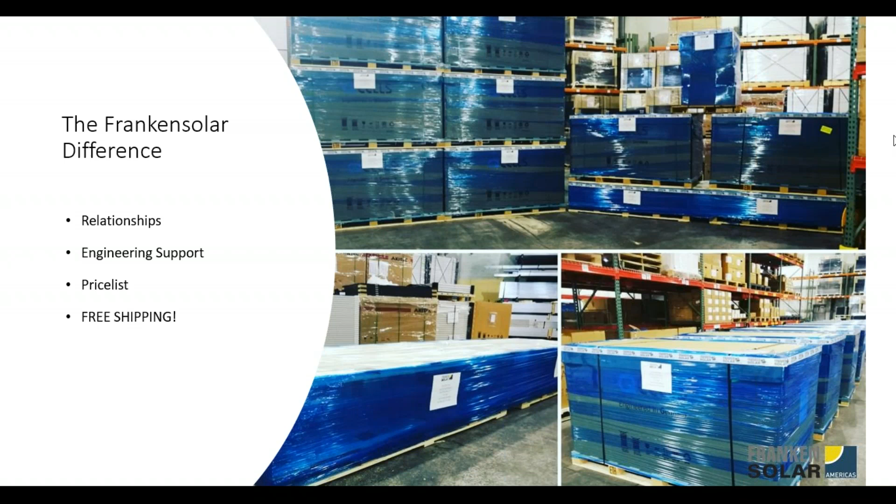So RoofTech, for those that were here early, Joe and I were talking about meeting up in Nova Scotia back in 2018 for the first time. That's the first time I really learned about the product. Basically what sold myself and the rest of the Frankensolar team that this is a really good product is, first of all, they've been around for a very long time and they've been very successful in the Japanese market. I'm sure Joe will talk about it later.

Also the fact that you can connect into the decking of the roof really gives us a lot of flexibility when we're installing on site, as opposed to having trusses and missing trusses and things like that, and having to pre-drill, etc. The RoofTech has been a great product, and pretty much from the beginning we just tried it out on a few sites with customers, and the feedback was really positive. So at that point we decided to stock more and more, and they basically just fly off the shelf. That's why we feel very strong about it.

And the RTMini, which is where we're at now with this slide, it really works in high snow and wind loads. It's super flexible because you're getting into the decking as opposed to the substructure, and it still allows for a rail-based system, which is nice.

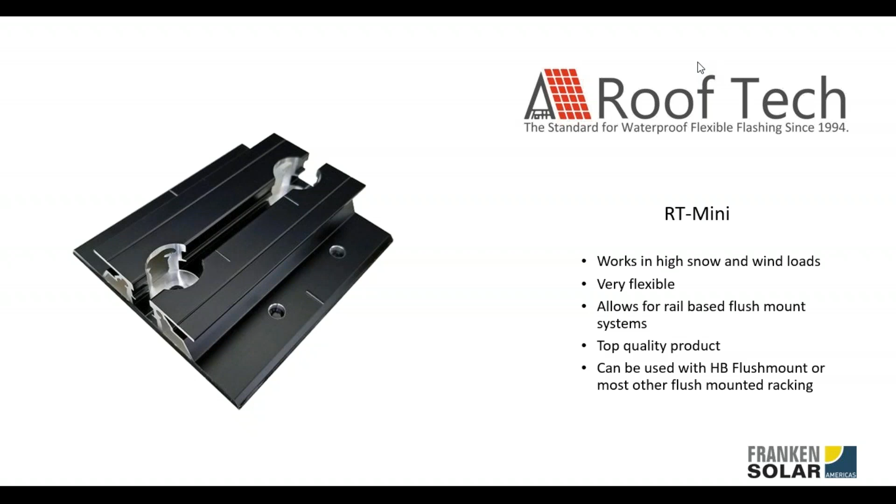So I'm going to start today off by giving a little background on RoofTech. Some of you may have already been made familiar with our beginnings and where we've been, our engineering and testing, our product line, and then we're going to get into some best practices and frequently asked questions.

And then we'll open the floor back up in case you guys have any questions about application or engineering or anything like that. So we are, as Danny said, one of the old school solar companies.

We started in '94 when the Japanese solar industry approached us, Yanegiken, to develop a way to attach solar PV modules

in a retrofit onto rooftops, which was a new idea. So Yanegiken is a 55-year-old manufacturer of roofing technologies, everything from fasteners to underlayment to tile to shingle.

So there was a natural relationship right away. If you're going to do rooftop solar, let's get the roofing industry involved.

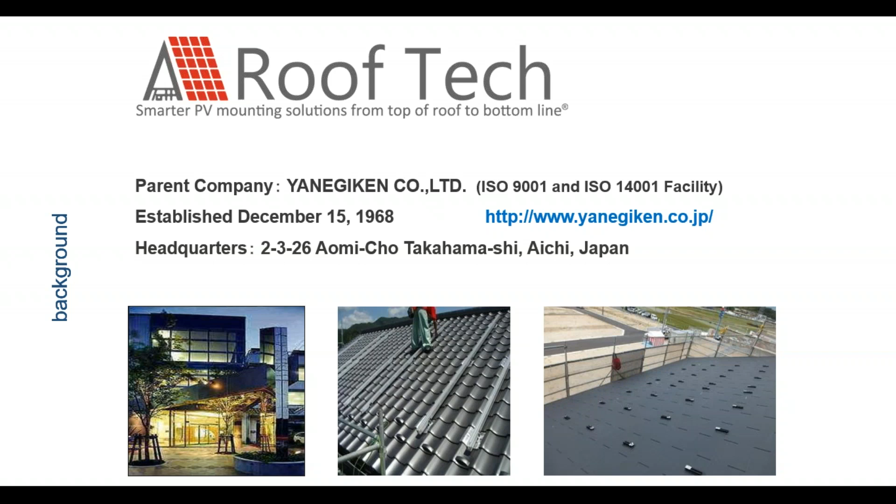So in the coming years, you're going to see more innovations quicker because we just have more bodies and minds developing solutions for our market. So we're really excited about that.

Like I said, in Aichi, Japan, our headquarters, Yanegiken has a facility where we do all of our testing and engineering. It is a robust testing facility with mechanical load testing,

carbon arc to simulate the aging process, high intensity blowers, and salt spray.

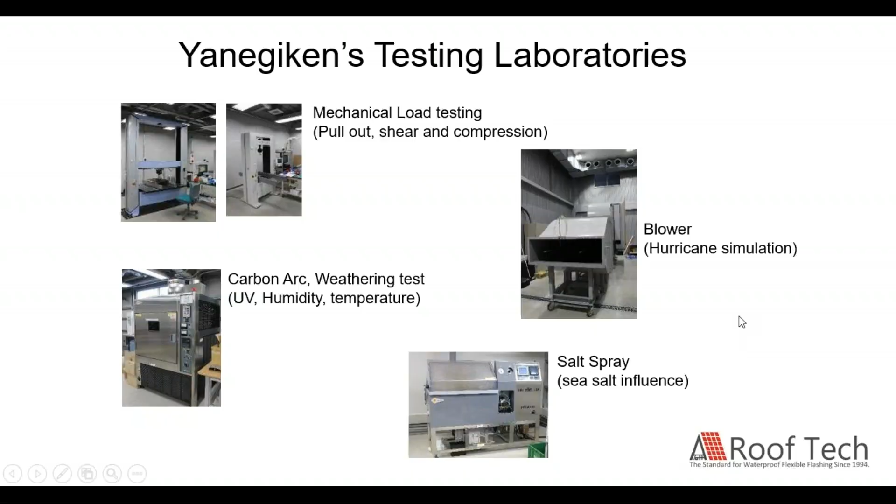We also have outdoor facilities. So we have sections of land by the sea, in the mountains, and in urban settings where we mount our products and wait.

When I say wait, I mean wait like 30 years. Our technologies have not changed since their first iteration.

The RT Butyl and the aluminum base have remained unchanged, as well as the double helix fasteners that we use in our products, unchanged since 1994.

And those were all materials that we had borrowed from our roofing

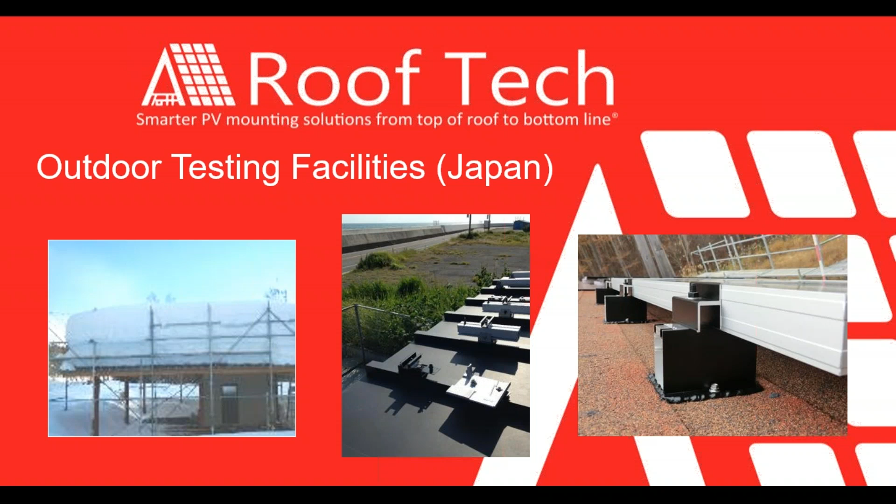industry and brought right into solar. So it makes it strong, it makes it robust, and it makes it something that stands the test of time.

As I mentioned, either you know RoofTech or you don't, we do things a little bit different. Rather than using an 8mm or 5/16 lag going into the rafter,

we utilize a 3/16 or 5mm wood screw. That provides you with a much better opportunity, a much higher percentage of placing that fastener onto a structural member in the sweet spot, that center 61%.

Because anything outside of that center 61% would not necessarily provide you with a sound structural value, right?

And that is a much smaller margin when you're looking at that 5/16 lag. You've got 37% of that rafter to hit compared to 61%.

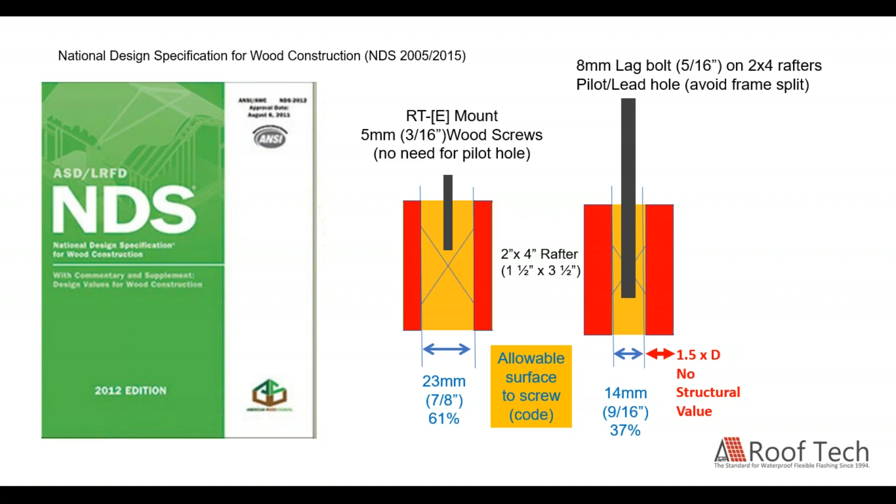Substantial difference. Like I said, with our butyl, that butyl gets driven through, whether you're going into the rafter or you're attaching to the decking. Our RT Butyl has been around since the beginning of our roofing business. Butyl was a common material to use for roofing. It's hydrophobic, it's malleable, and it lasts a long time. The RT Butyl is proprietarily our own. This is not the same butyl or mastic or anything that you could buy at a home improvement store. This is developed by us and produced by us, and that difference is, I'll leave it to the tale of the tape.

We have a 25-year plus service life. Some of our first systems from '94 are still in service. So we've got 26 years of leak-free performance with over 100 million roof penetrations worldwide, with about 20 million of those being in the United States alone. We've had maybe 5 calls for leaks out of those 100 million roof penetrations.

Have been with people that were fairly careless. The one we've had in North America, the installer self-admittedly installed our bases on top of ice. So it was destined to fail. But with that said, we went out, we evaluated the site, we had a candid conversation with the installer, and we spent a couple days making sure that the entire staff had been retrained on how to properly install.

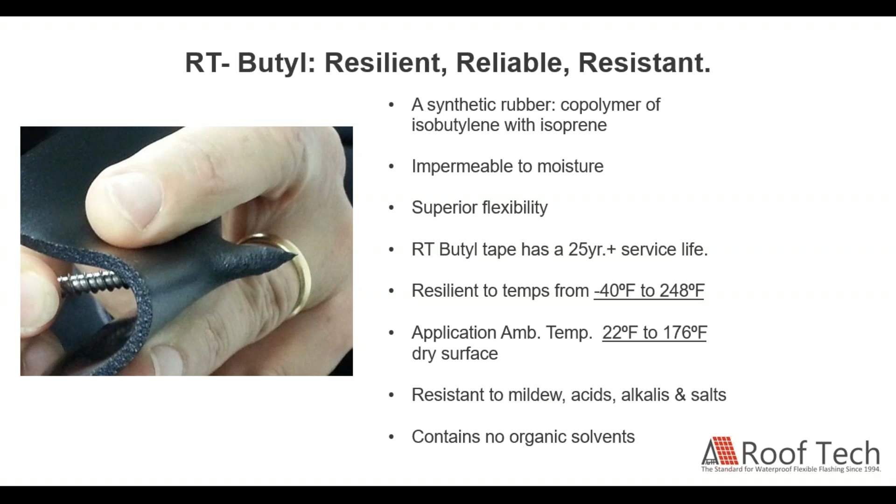And with that said, we do recommend that you just take a heat gun where the penetrations are going to be, and that is for two reasons. One, you want to have the surface warm enough to accept a penetration. You don't want to crack shingles, because we do a top-down attachment method. You wouldn't want the fastener that you're penetrating the shingles with to crack or break those shingles. So adding a little heat is not necessarily just for our product, it's for the integrity of the roof, because that is our number one priority, maintaining the integrity of the roof.

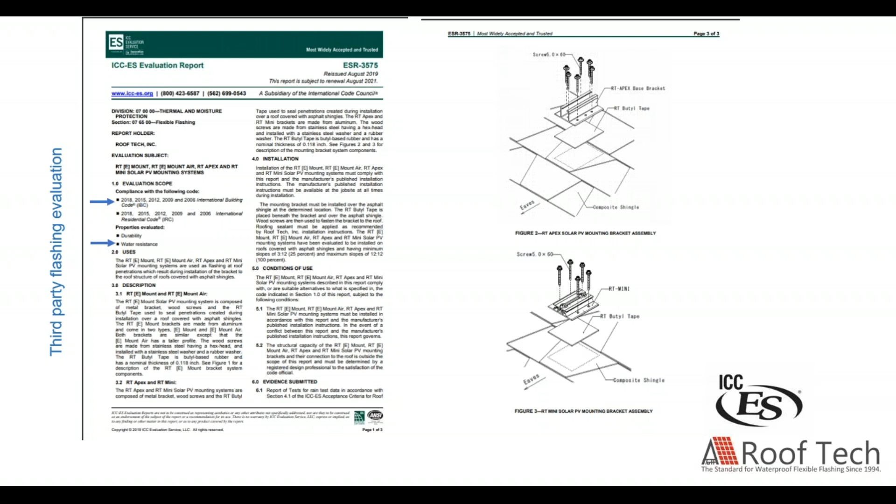That's why we go out of our way to test and engineer great products that we then send to third-party organizations. ICC, the International Code Council, evaluated all of our products, and specifically all of our products containing the RT Butyl, and it is a certified flexible flashing. So when people look at our product, they say, you don't trust something that doesn't have flashing. Well, that's good to hear, because I wouldn't trust something that didn't have flashing either. The only difference is that our flashing is a flexible flashing, and is actually bonding with all the layers of that roof surface.

As Danny mentioned, we have a couple new products coming out that we will be showcasing this year, once some of the conferences and shows in Canada reopen.

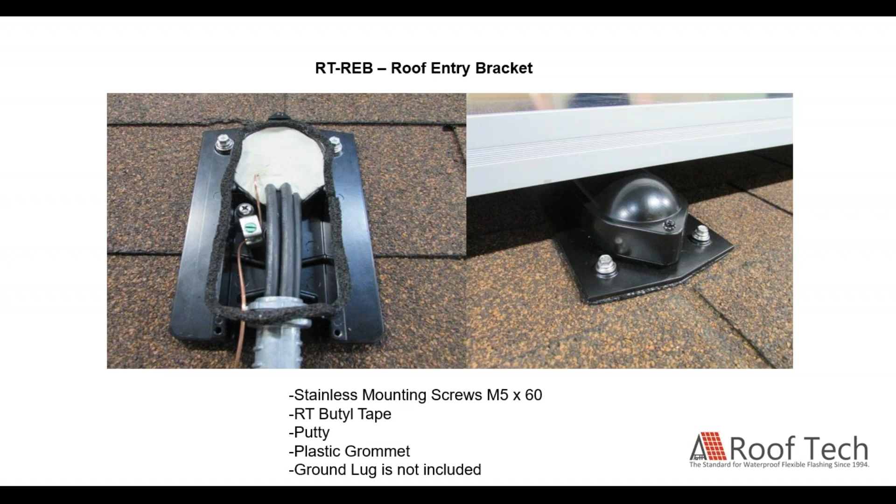You'll get a chance to see things like the roof entry bracket. This is a niche product we're really excited about. Like all of our products, you can install the RT roof entry bracket on asphalt or metal roof. As a pass-through, it's a pretty elegant solution for metal roof. For asphalt, personally I like something with a combiner box so you can turn them off before you enter the roof - I think that's valuable for most contractors I've talked to. However, jumping from array to array on a single project, a dormer to a main array, these do offer some flexibility. Definitely worth a look, and we're excited about it.

The star of the show, the RT Mini, has been an amazing product for us. It's gotten people really comfortable with our attachment technology - the flexibility of being able to hit the rafter or the decking, to keep using whatever L-foot and rail you're comfortable and like using.

Really all you get away from is prying up shingles and having to patch holes when you miss a rafter. What's beautiful about the RT Mini is I tell all my customers, aim for the rafter, because that's your most cost-effective attachment method - 2 screws on the north and south hole. If you don't feel that north center screw bite into the rafter, you simply add 4 more screws to the outside, and that's a deck attachment. Being so close to the rafter, you're still getting the engineering and structural value as you would with a rafter connection.

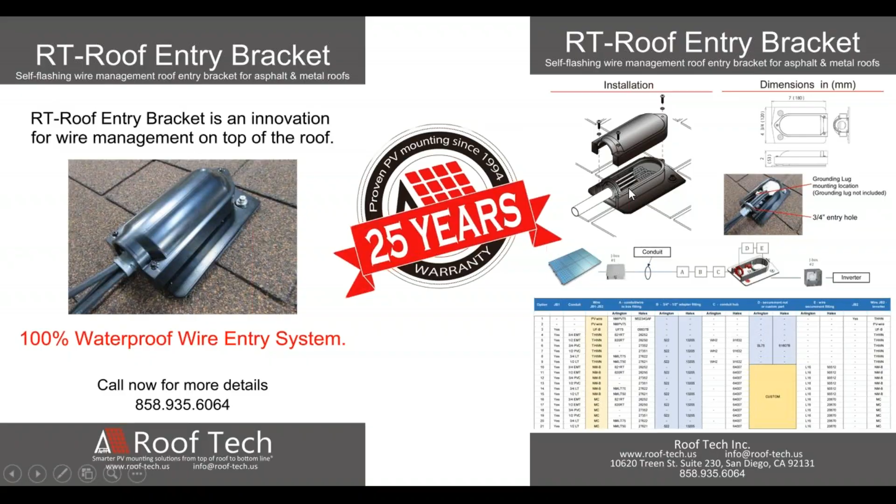Our newest entrant into the product line, the roof entry bracket, obviously cannot be put on a flat roof because there's a big hole where wires are going to go - we wouldn't want water that pools to seep in there. So we require a minimum of a 3:12 pitch for the roof entry bracket. However, all of our other racking solutions can be used on a flat roof, as well as 45 degrees, with our pre-stamped engineering.

If you had an application that's 60 degrees, or you were going to do a solar wall at 90 degrees, you would need a site-specific engineering evaluation - you wouldn't be able to use what we have pre-stamped. However, if you run into one of those situations, you always have an open door with the RoofTech team. Send us what you're looking to do, and we can provide whatever information you need to your engineering team to make sure they can get this project approved for you.

The beauty of our attachment is that it's foolproof, or oops-proof, we like to say. You aim for the rafter. If that thing is dancing around underneath the decking and you put that first screw in and it misses, you can now do a deck attachment and you're not removing anything. So there's a lot of time saving - you're no longer prying shingles, you're not pre-drilling, you're not pre-caulking.

And all of this is with a waterproof base that is pretty much the same price - I'm sure Danny can provide you with the information, but it's the same price as a typical flash kit. So it really is, like Danny said, a no-brainer. It's revolutionized flush mount racking for rail and L-foot, everywhere from the Yukon Territory all the way down to the tip of Florida, where we have hurricane winds. So extreme snow conditions and extreme tropical weather, all covered by the same product.

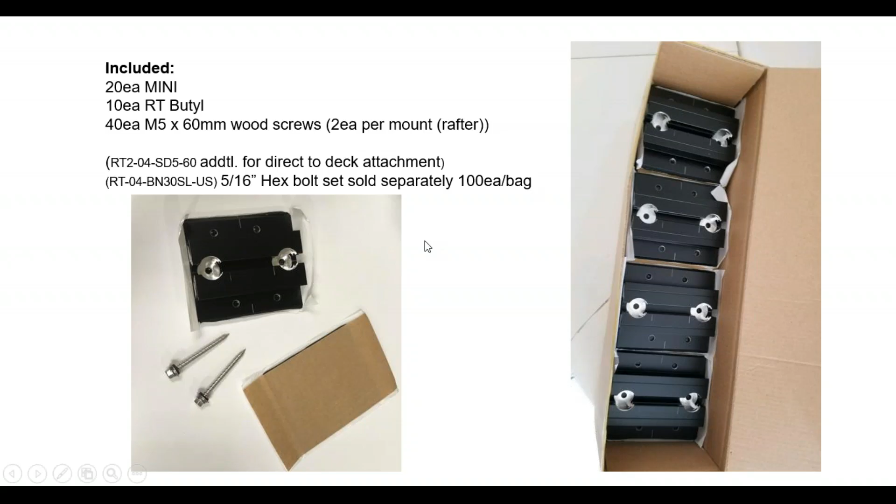The RT Mini in action is a beautiful thing. Teams like it. People, when they try it, they typically gravitate to it. They bring it on as a boutique solution for that weird job. The crews try it, they love it. They end up using the RT Mini for their entire program.

Your guys on the roof, they're going to love not having to pry up shingles anymore, not having to cut shingles. I mean, it just makes a difficult job... And this is from a guy, I was just on a 3-story roof, a 31-degree pitch, being up there laying down RoofTech mounting products, whole lot easier than being up there popping shingles. The guys were really appreciating our technology today.

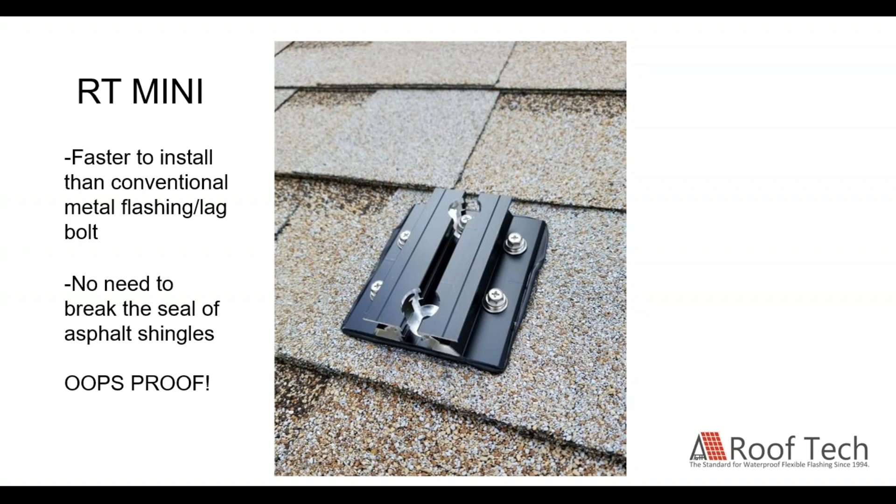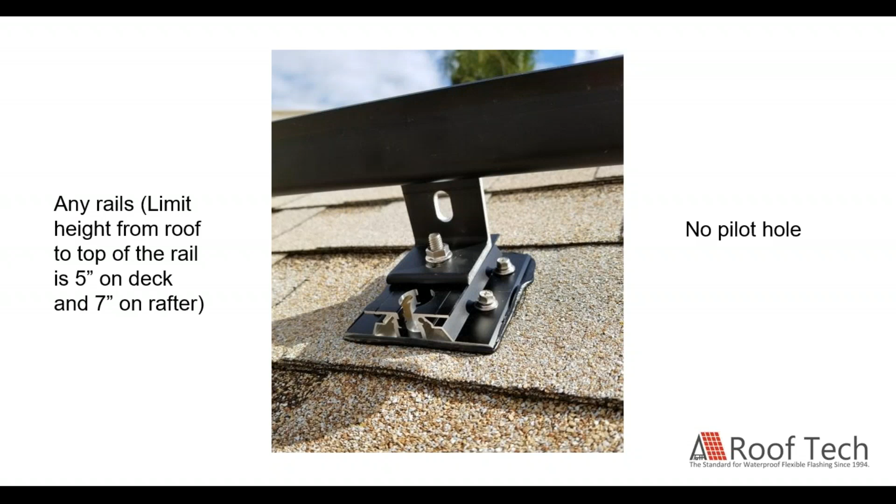Here in New York and New Jersey, it's been about 90 degrees with 90% humidity this past week, and with it being the first week that I could be back out on the road with a level of confidence, my calendar has been full with trainings and demos. Like Danny said, we have a new rail system out, and it's been very popular. And so I've got a pretty steady mix of people looking to bring on the RT Mini and the Apex.

The RT Mini, like Danny said, is super flexible. You've got anywhere you need to put a connection on the roof. Like say you have a pesky rafter, and where the rafter and the module meet up just doesn't work for the cantilever allowed by your AHJ. That is a great opportunity for you to just put an RT Mini down on the decking and fit another column of modules on that project. It really does end up making a difference.

Oh, and this also can be used for a conduit mount, which is quite convenient. I have installers here that actually cut the Mini in half with a bandsaw when they're using them for conduit mounts, because there's no structural value necessary for a conduit mount. You do not need to maintain the integrity of this unit when it is used to support conduit.

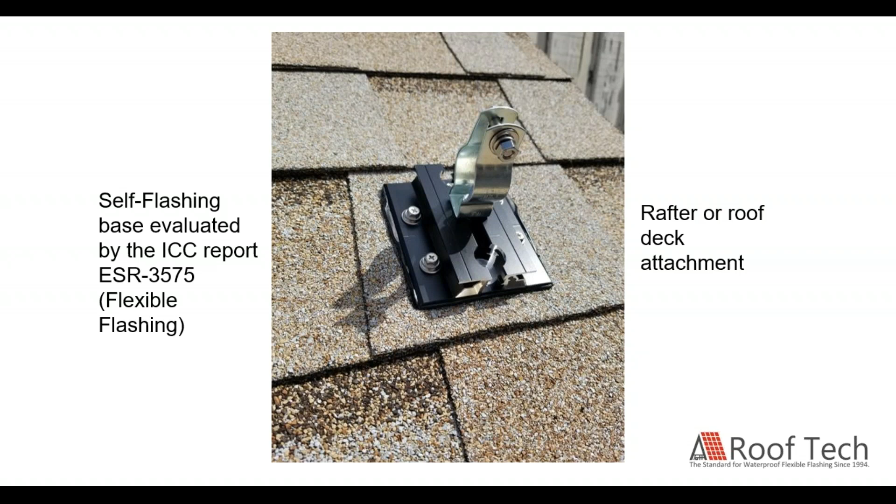I tell guys, you can use it, you throw 2 screws in, and you have a conduit mount, and 1 Mini is good for two conduit mounts. So pretty versatile, and for those things that don't require a structural letter, it's simple aluminum, so it's easy to cut through with your bandsaw.

Nova Scotia in 2018, I went on a project with Solar Global Solutions. This was a monster 45 pitch, like 2-story home that sat on top of a hill. So when you were up on the roof, it felt like you were probably flying Air Canada out to Calgary. That's how high up you were. It was a very clean install. They installed HP flush mounts on top of Minis. They were using a rafter and deck attachment, which there's engineering for that hybrid attachment.

So you can get your span numbers pretty easily by taking the span for your rafter and the span for your decking, which can be found in our pre-stamped engineering tables for the provinces you live in. And you take those and you find the average of those 2 attachments. And by attaching to rafter and deck, alternating those attachment points, you can use the average of those spans, therefore giving you ultimate flexibility. This is a typical installation.

I mean, this is where having an ease of installation counts. A 45-degree pitch, way up high off the ground, and you're still able to conquer pretty high snow loads and wind speed. And I drove by that project after the hurricane had passed last year. I wanted to see if all of my RoofTech projects that I knew of were looking good, and all of them were still square and no damage. So I was really happy about that.

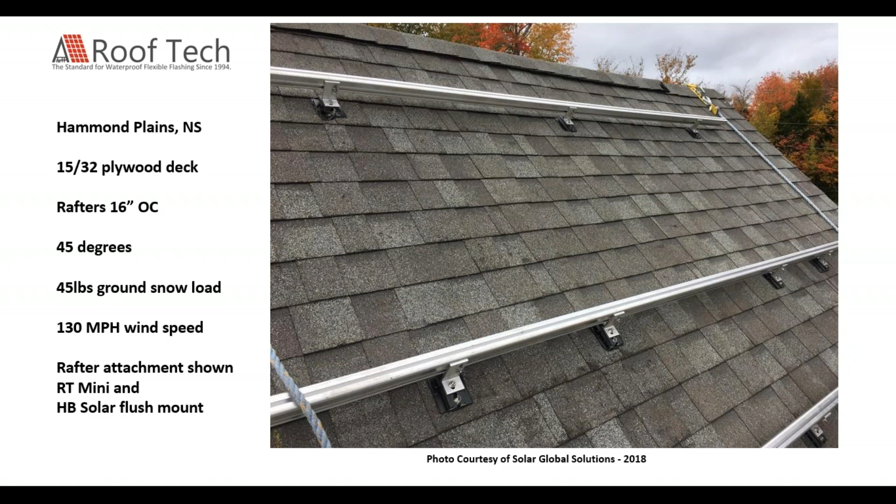The RT Mini being ICC certified, it provides a level of confidence when you're submitting your paperwork for permits. Our engineering is robust. We leave no stone unturned. There's no gray areas. There's no question marks. If you can't find the supporting documentation you need for your permitting purposes on our website, we always are available to help get your project approved.

The RT Mini does not need to be UL listed because there is no connection to the electrical aspect of the array. It's just like an L-foot in that matter. The cantilever and maximum rail length between thermal splice is definitely based on your manufacturer. I know HB, I want to say, is 14 feet. Dan, you can probably correct me on that.

Yeah, with that splice, you want to use splices. You want to make sure you're following what the rail manufacturer calls for splices, because thermal expansion and contraction can really wreak havoc on a solar array.

The 2 bolt slots, you'll notice here, the top diagram shows the M8 5/16 hex bolt channel that you would use with your L-foot. The bottom is a 1/4 inch hex, and that would be used for your conduit connections or your conduit supports or any other items that you have on the roof. That can also be used to support your electrical devices that are complementary to your array.

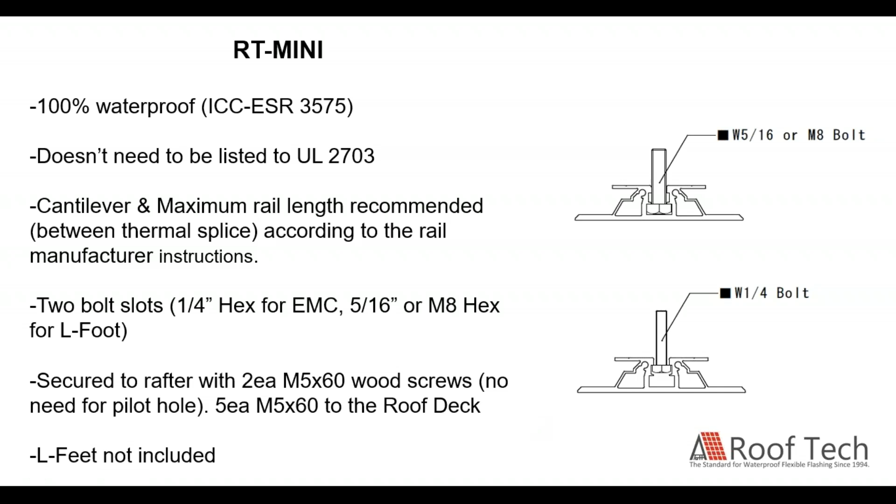With that said, no pilot holes. I repeat, no pilot holes, guys. We do not need to spend extra time on the roof. All of our engineering tables have cut sheets at the back. So you're going to get the letter from the engineer, all of your span charts, cut sheets, and all of the appendices of how to install and the different scenarios, as well as the methodology that our engineering team used to achieve these numbers. So everything is about transparency.

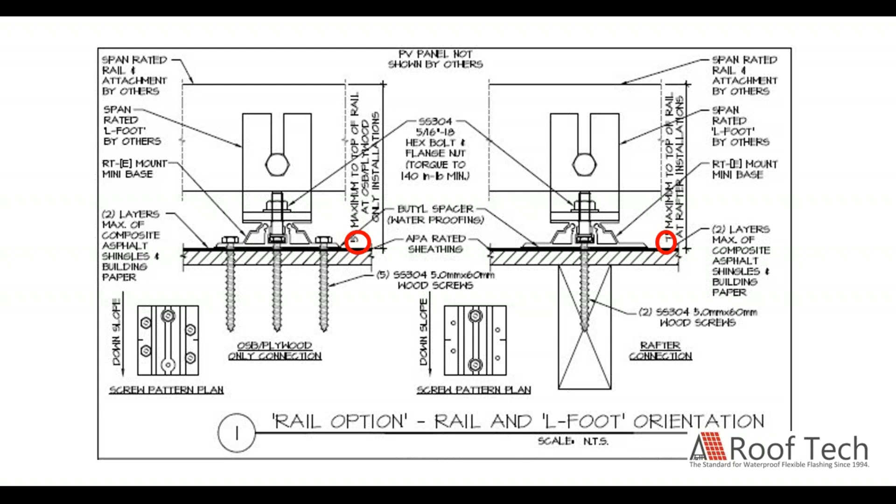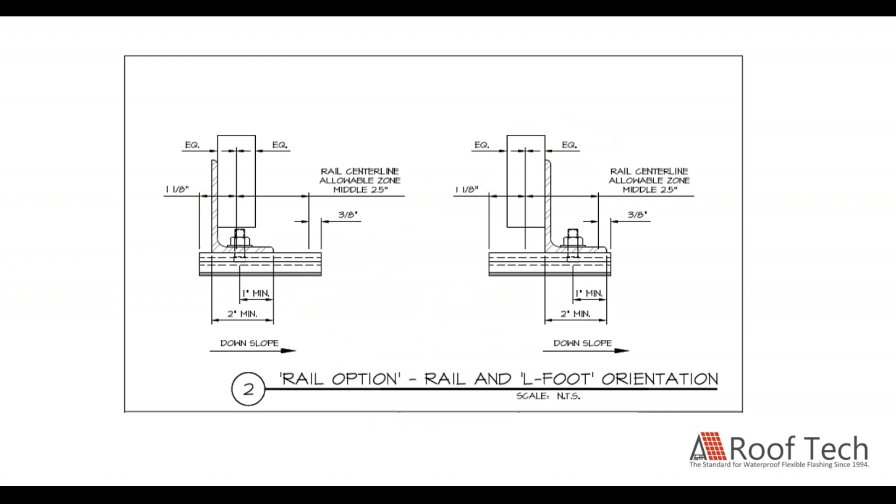Pretty simple installation. The installation manuals can all be found online. Fairly easy stuff. When I get asked to go out and train people on the Mini, crews oftentimes are like, wait, my boss seriously asked you to come show me how to do this?

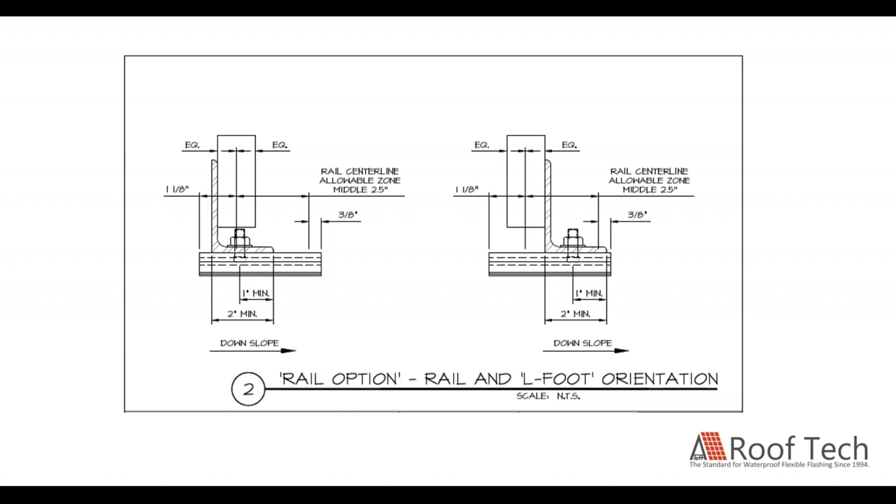And it's a big joke that people will send me to train their staff because they feel the guys deserve lunch, and I have achieved the nickname in Massachusetts and New Jersey as Uncle Joey. When I come on a job site, if anyone's ever met me, they know I fear no food, and the guys recognize that immediately. They're like, "Oh, you're a Japanese company? Can we do sushi today?" I'm like, "No, we're gonna do hoagies." It's always a good time, and I try to bring an atmosphere of fun and high energy.

Even when I go to train something as simple as the RTMini, where truly all you need to master to install the RTMini correctly is: A, you need to be able to read, B, you need to be able to run a tape measure, and 3, you need to be able to operate an impact driver. It's really that easy. You snap some lines, create crosshairs, you find your rafters and you apply.

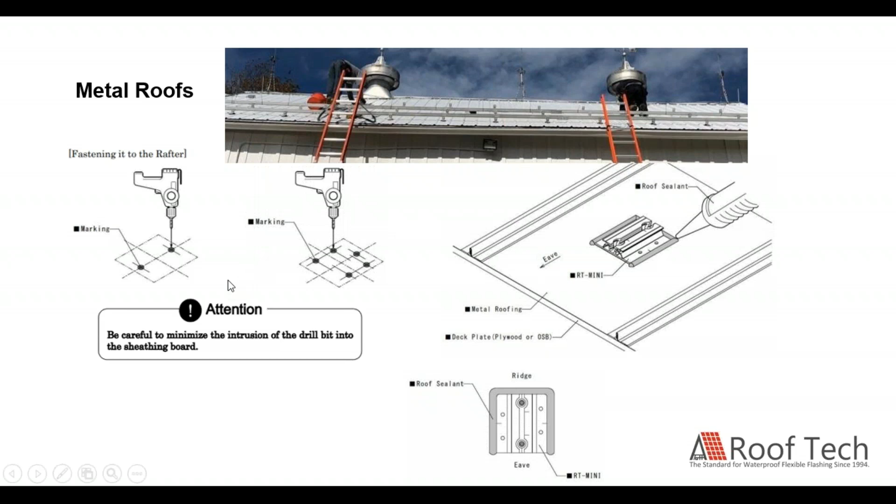Now here on the metal roof, I said that it wasn't necessary to make pilot holes. There is a caveat. On your metal roofs, you're going to want to punch or pre-drill. Not that our screws cannot penetrate that, but because it will take a moment for the screw to pierce the metal, the spinning of the screw will actually spin the butyl away from the penetration, making it not certain that the butyl will actually travel with the screw through the different layers of the roof. So we do recommend, and it is in our installation manual, that on metal roofs you pre-punch or pre-drill your penetrations.

This is an example of the span charts that you would find. This is the version we have for the U.S. The version for the provinces is right in the same section, and it looks just a little bit different because our Canadian engineers just use different fonts and colors, but it's pretty simple stuff. You find your snow load, the wind speed that you have to achieve, your roof pitch, your exposure category, and then finally your roof area, and you will find your spans.

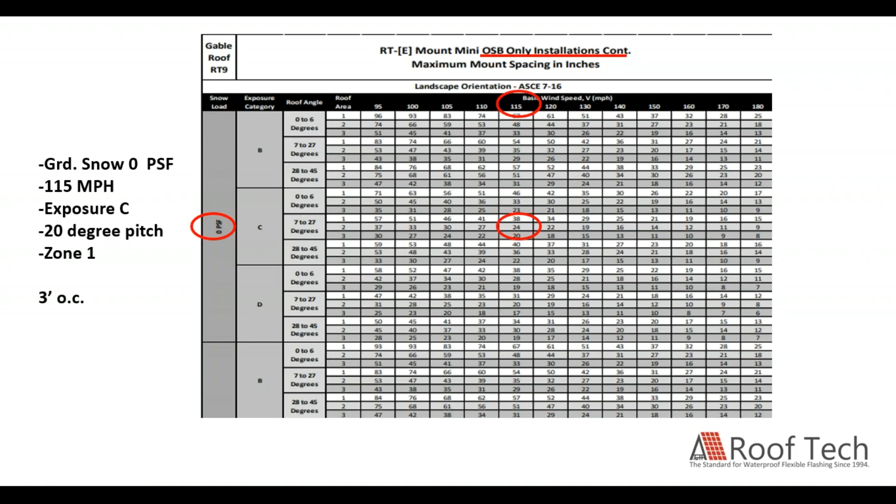All of our span charts are now in inches rather than feet. We were getting a lot of false zero values because anything less than 24 inches, the typical rafter spacing, would get a 0. That was very misleading because that was actually a value. If you had a 16-inch on-center rafter spacing, that wouldn't be a 0. So we moved over to inches, and it's made a big difference and cleared up a lot of confusion for some folks. But really easy stuff. If you ever want to dive deeper into our engineering letters, we'll be happy to walk you through it.

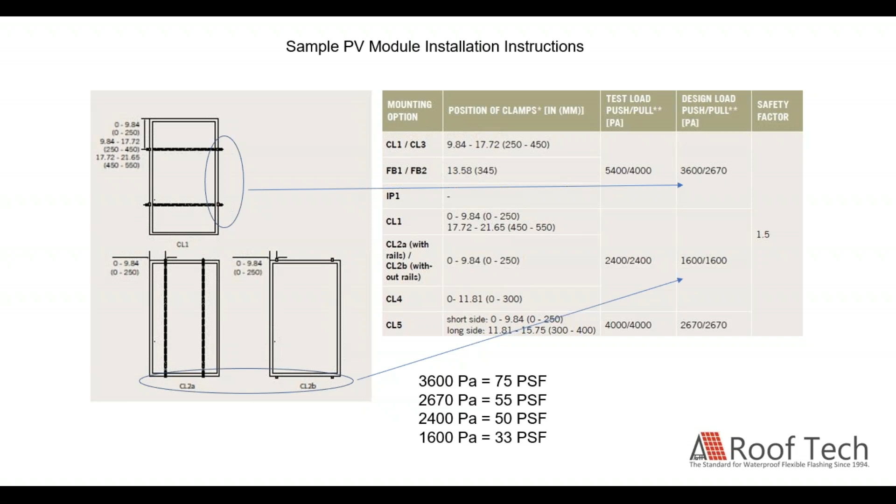Sample PV module installation instructions. It's all about looking at the installation manual for all of the components in your system, making sure you know where the clamping zones are for your module, the optimal rail lengths and splices for your rails, and the installation procedures for your flush mounts, because you want to make sure that you're not racing to the bottom. You want to make sure that in your methodology of installing this system, you're maintaining all of those warranties that will help you guarantee a high level of quality for your customers and your continued success in your business. It takes a little extra time, but making sure that things are torqued to the right spec and placed in the right place really makes a big difference.

So specifically in our installation manual, we have a maximum span of 8 feet. That's in optimal conditions. I don't know that there's anywhere in Canada that we can achieve that span. However, regardless of what we're able to span, you want to make sure that your rails are going to support whatever you're hoping to achieve.

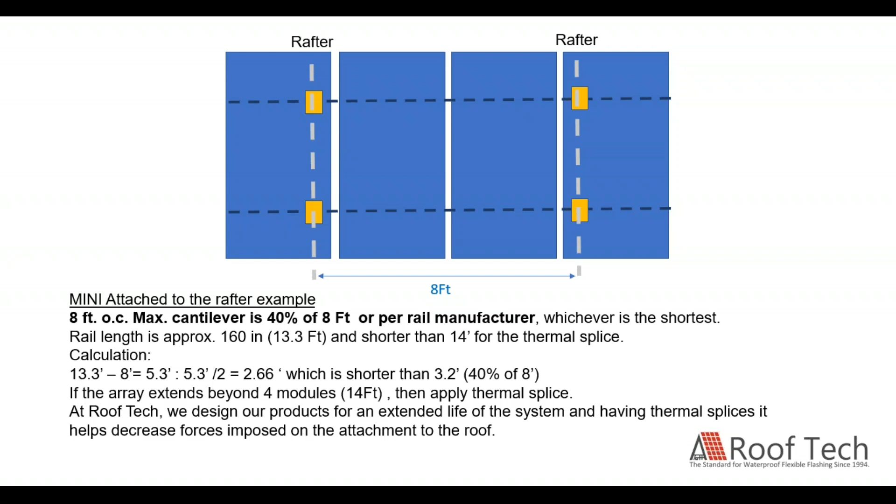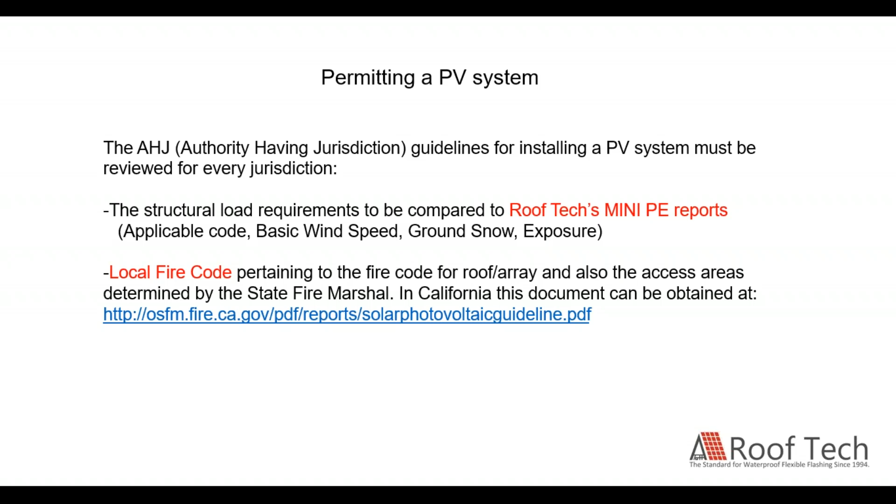In Canada, I believe that any span that you'd be looking for would be figured out. Again, your AHJ, your authority having jurisdiction, is the law of the land, and we all have to follow that. But if you ever have an AHJ that's asking questions that you feel are pretty well spelled out by us, and you just need some support in that conversation, again, we are happy to help out.

Now, let's talk about installation. You've got a shingle course, and you have to put that base right where the shingles are all meeting. It's really as easy as 1, 2, 3. The additional butyl that we add into the boxes for each base can be used as a shim to provide a level space, a level position for your mount to be placed.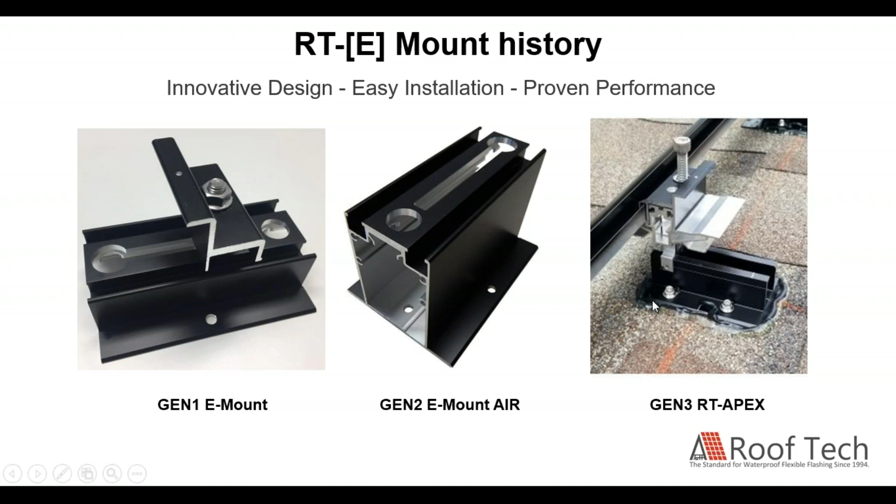The RT Apex is a pretty great product. It's all the best stuff in railless right now. You've got your universal clamping, so everything from 32 to 40 millimeters, which actually will be expanded to 30 millimeters to 40 millimeters universal clamping. That's probably due out in September.

We have snap-in installation, easy leveling, and of course our integrated flexible flashing that provides that waterproof connection to the roof every time. Everything is covered with a 25-year warranty, covering your mechanical attachment to the system, your mounting to the roof, water intrusion, and the overall function, with products free from defects.

We have a one-tool design, one-step leveling, which really makes it a robust system. And because of how we've designed this system, it's a breeze to install in high snow loads.

When this is released for the Canadian market in 2021, you will be able to use this pretty much anywhere in Canada, up to 75 pounds of snow load. We're really excited, and we're looking forward to 2021 when we can get on some roofs and show you what the RT Apex can do.

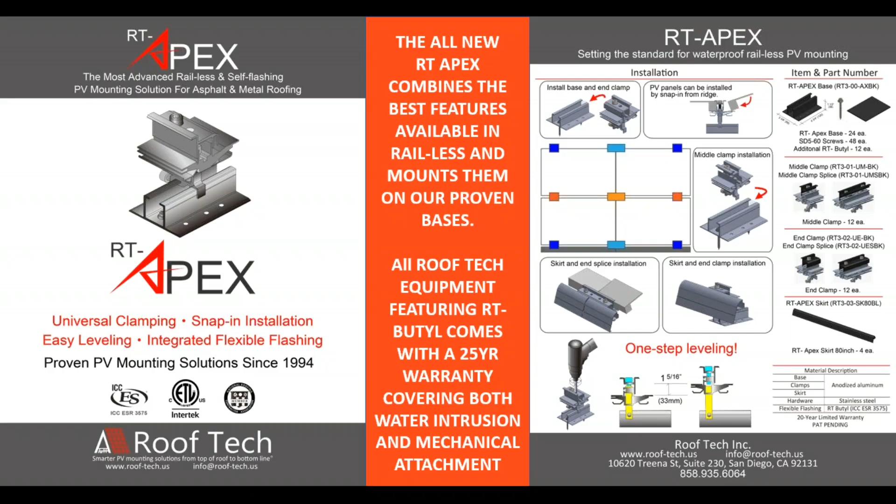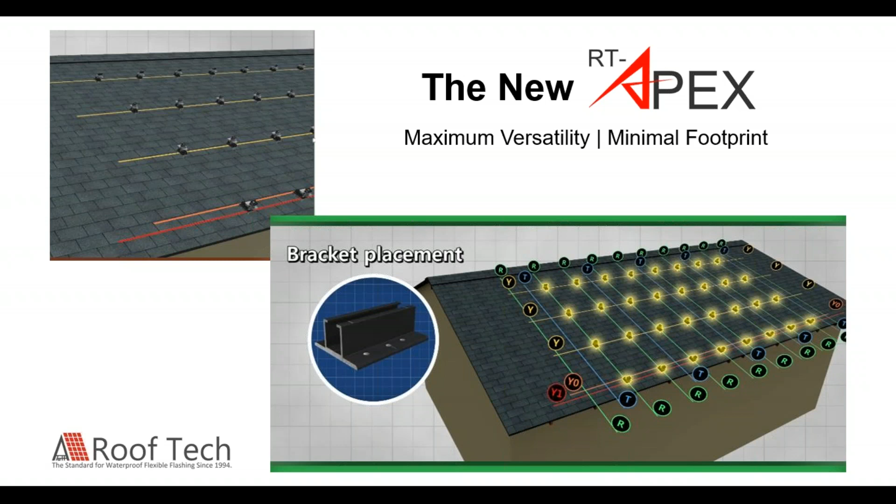The versatility of railless is great. It reduces shipping costs, and shipping is a big deal. That's why the team at Frankensolar decided to move to free shipping in Ontario on orders of 5,000 or more, because shipping matters—anywhere you can save, you should, because it makes a difference to your long-term success strategy. With railless, your shipping footprint is minimal. I have a Subaru Forester, and I can fit about 25 kW of equipment into it, skirts and everything. Pretty awesome system.

Railless has some advantages. You're definitely spreading out your point loading rather than having one attachment per 8 to 10 feet of rail, or 2 attachments per 8 feet of rail—you're having several. So there's a more distributed weight on the roof, therefore less opportunity for any kind of structural damage.

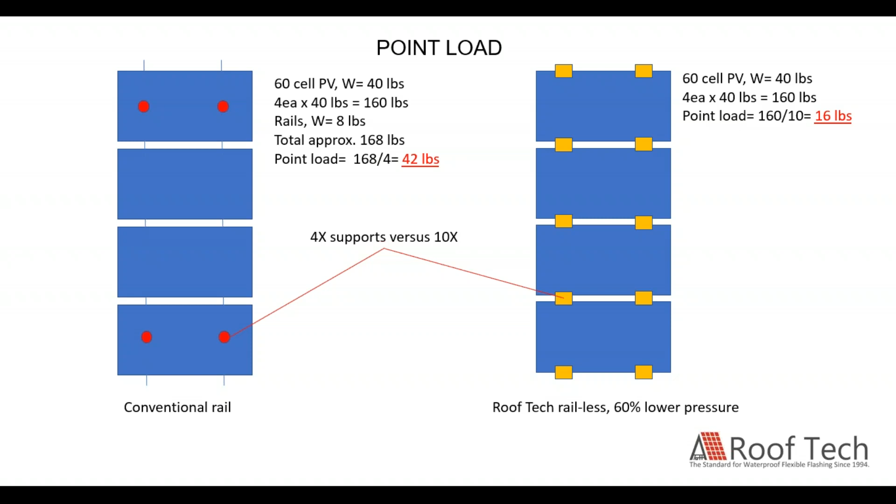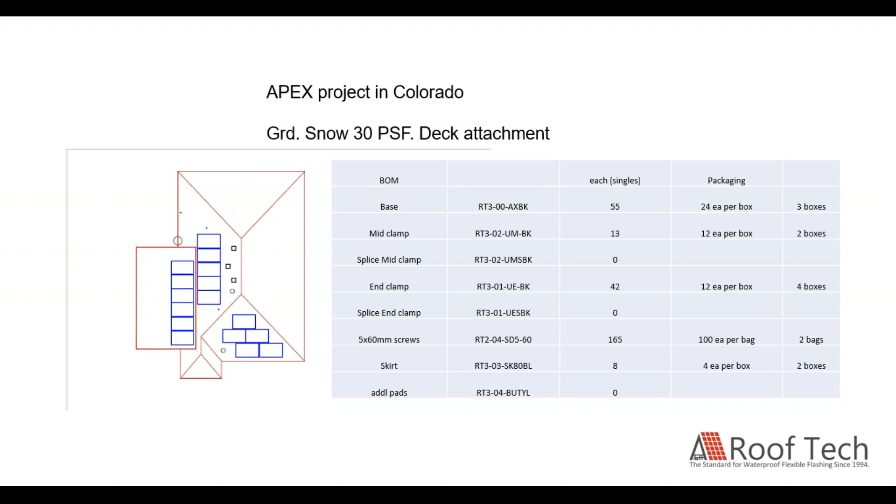This is a project that we demoed out in Colorado. Pretty cool little system, with a small bill of materials—you've got bases, mid clamps, splices, end clamps, screws, skirt, and additional pads of butyl. We were working with Solaria modules, and the finished product came out great.

This one was cool because there was a flat roof that was mated to about a 20-degree pitch roof, so we were able to do 4 points of connection. The system came out really easy—though 4 points of connection isn't necessary. We do have splices that can be floating or supported, so there's a lot of combinations for how we can rack these modules. By the different attachment methods and different racking strategies, the RT Apex is super versatile.

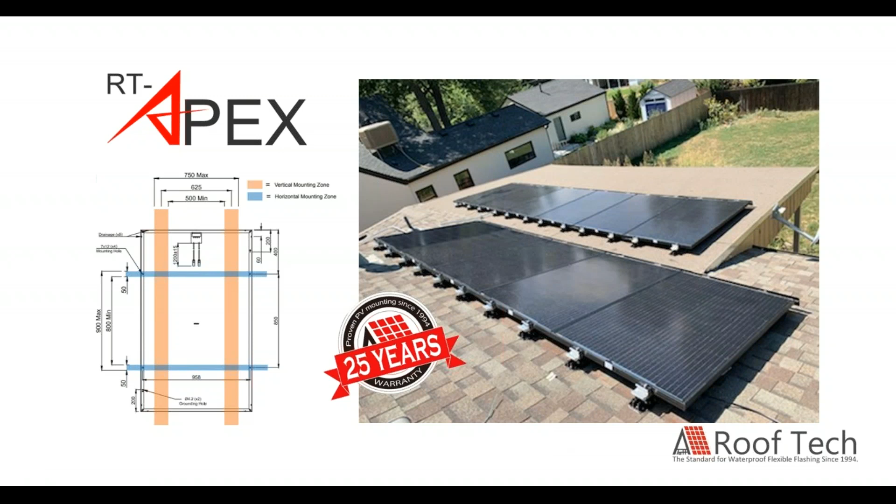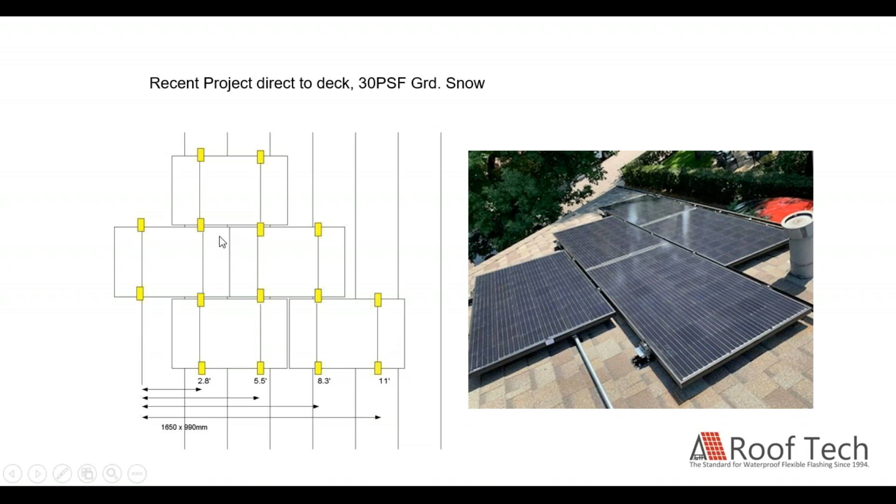Staggered arrays with 4 points of connection, super easy. This one was all on the deck—I don't think we did one rafter connection on here—so we could put that array anywhere on the roof we wanted. Your installation teams have the freedom to make their way around an obstruction on the roof that maybe wasn't in the plan set.

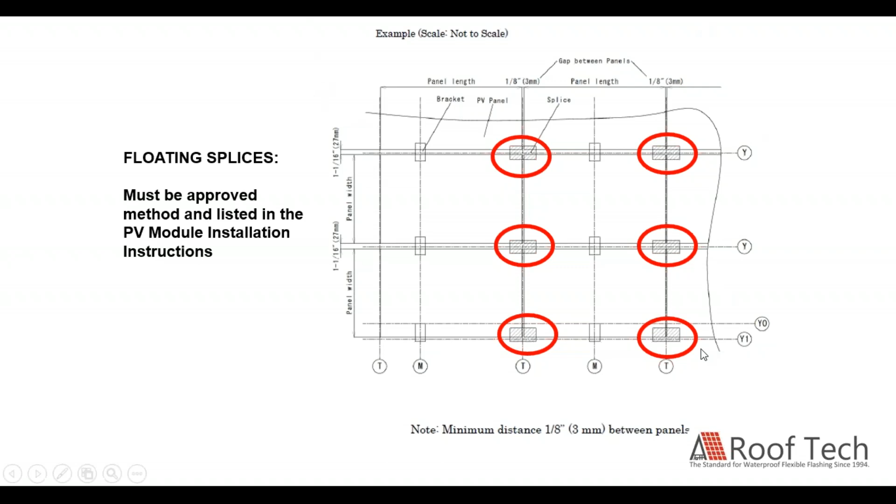This is just going over how the corner clamping works—we're going to breeze through some of this. I talked about the hybrid attachment method, combining the rafter and deck tables.

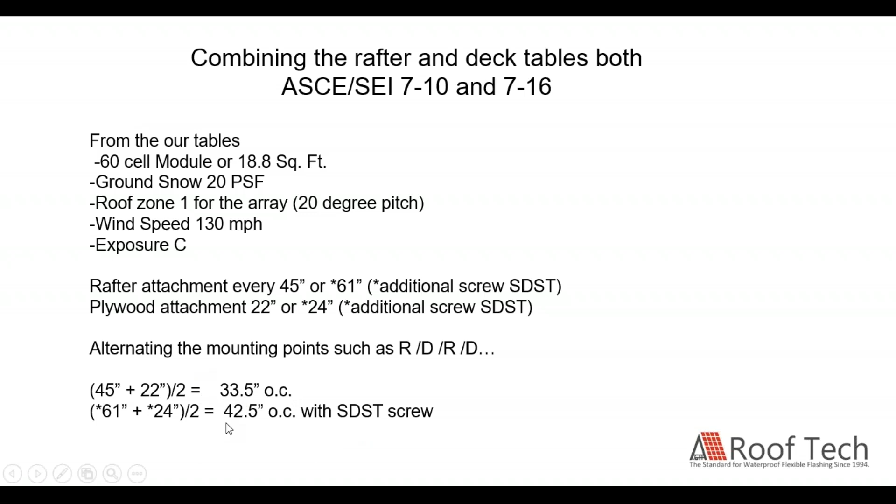Really simple stuff: you take your value if you're attaching to the rafter, using the span charts with your ground snow, exposure, roof zone, and wind speed to find your span. Then if it's OSB, plywood, or plank, you find those values on those charts and take the average—that's your span. For example, a rafter attachment every 45 or 61 inches, and a plywood attachment every 22 to 24 inches, would make your spacing 33.5 on center or 42.5 on center with the SDST screw.

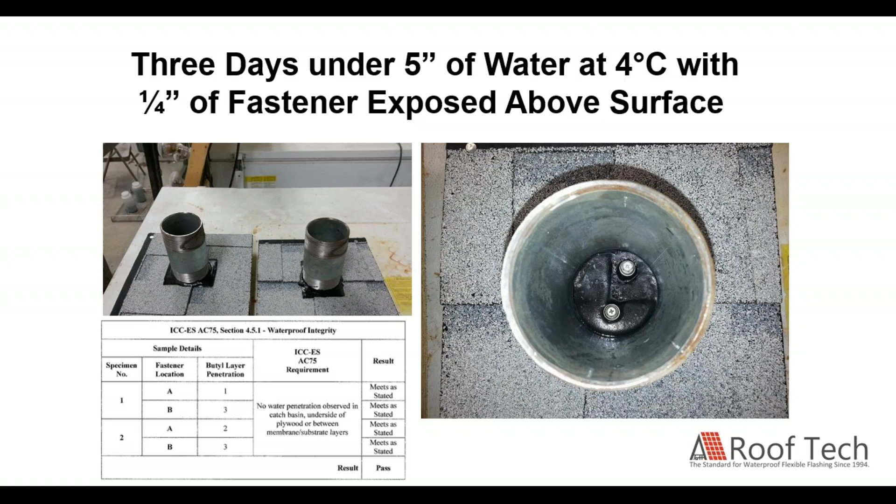Our waterproofing testing goes to a large degree. In-house, we do a 90-day submersion test where all of our products have to sit in 4-degree water for 90 days. We also do freeze and thaw tests. If a new product doesn't pass, it doesn't go to market. This is something we do in-house just to ensure we're putting the best possible products out into the world.

I want to move into the warranty now, because you're not just buying a flash kit from RoofTech, or a railless solution. When you're utilizing RoofTech products, you're also buying a certain sense of peace of mind, knowing you've got a high quality attachment that offers a warranty on those products for 25 years, backed by a 55-year-old roofing manufacturer that's the largest and oldest in Japan. So we're not going anywhere. We're a completely bankable, scalable solution for all of these things.

And we've put our money where our mouth is for 26 years in solar attachment. So when people look at our warranty, they'll notice something very clearly. I encourage you all to go on our website and download the warranty. It's a simple PDF, a one-page PDF. And you'll notice one thing immediately: it was written by lawyers. Like everything else, legal has their final say on what we publish. So it's definitely, you know, lawyer speak, just like any other warranty. I wanted to cut through some of that with you guys because we get a lot of questions.

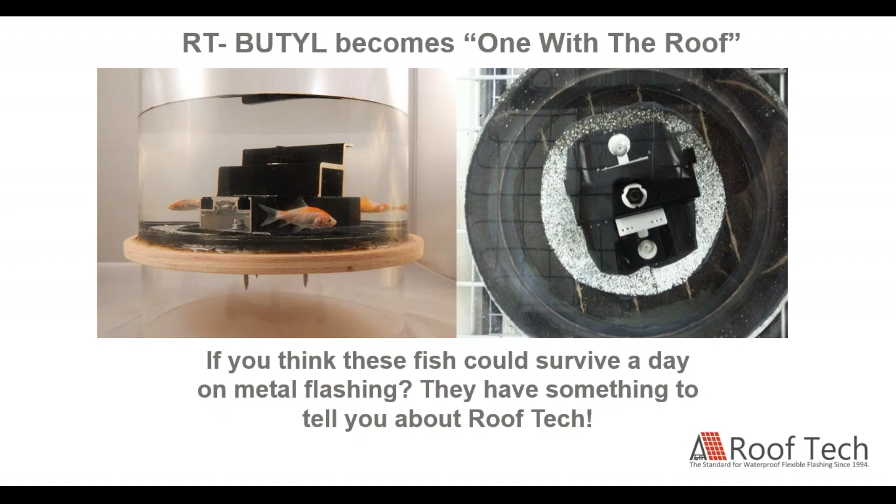A metal flashing is just another shingle and is not waterproof. You can make anything watertight, but that's only so long as that torque is undisturbed. I tell people regularly that watertight is an installation term, not a qualitative term. So with that said, it's all about being waterproof and having that waterproof proven. That's what we've done for 26 years in the solar industry.

So I am really happy that you guys spent some time with us today. I encourage you to contact us if you need anything or want to know more. If you're interested in being one of the contractors that tries out the RT Mini or the RT Apex when we bring it to the Canadian market in spring of 2021, we're starting to get those conversations started, because before you know it, it will be spring 2021.

I know we've got a long, hot summer and fall ahead of us, and a lot of work to do in that time. But nothing like preparing well in advance.